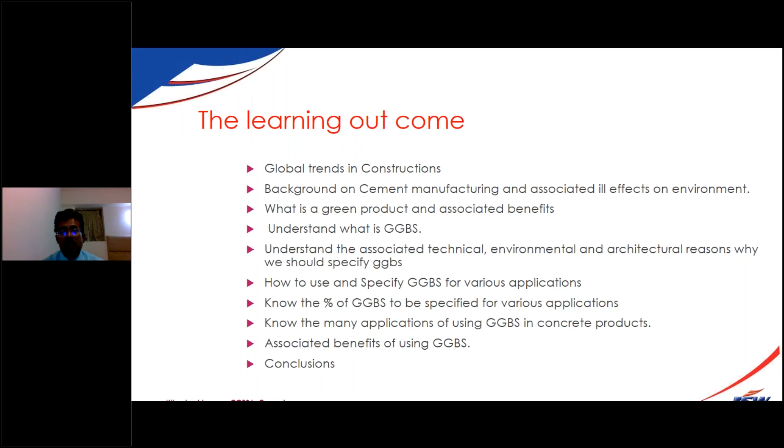Hardly were we making M15 to M30 concrete. Somebody makes M40 grade of concrete - it was a great achievement at that time. But now things have changed. Now we are using a series of mineral admixtures, performance enhancing nano materials, ultrafine materials in concrete admixtures. We have already migrated from ordinary lignosulfonate based admixture to Glenium or PC based admixtures. The technology is advanced, and we are using a lot of nanomaterials in concrete making.

The grade now - recently I was checking, M20 grade was predominantly 70%. Now in Bengaluru, I'm checking the M30 grade - we have already migrated to M30 grade. About 60% of the concrete is M30 grade, or 50% of the grade. So as we increase the gradation of concrete, the usage of mineral admixtures plays an important role. In Karnataka itself, or Bengaluru itself, we are making M80, M100 grade concretes generally now for many structural applications. So when you go for high grade of concrete, we require high durability, high performance. That can only be possible using mineral admixtures, either fly ash or GGBS.

You can maximum use cement only up to 450 kg, pure OPC cement. Beyond that, the code does not permit because it becomes more and more brittle, and the rate of hydration will increase. But with mineral additives, you can go up to 750 kg based on the grade of concrete. That is the advantage of using additives in concrete making.

So why am I bringing this up? Using mineral additives or GGBS is going to help the whole world. We can see the growth of population, the trend of global population growth. This graph shows 9.2 billion population will inhabit this planet if no world war happens by 2050. I'm talking about another 30 years. The population growth is phenomenal. We are adding more and more people to the planet.

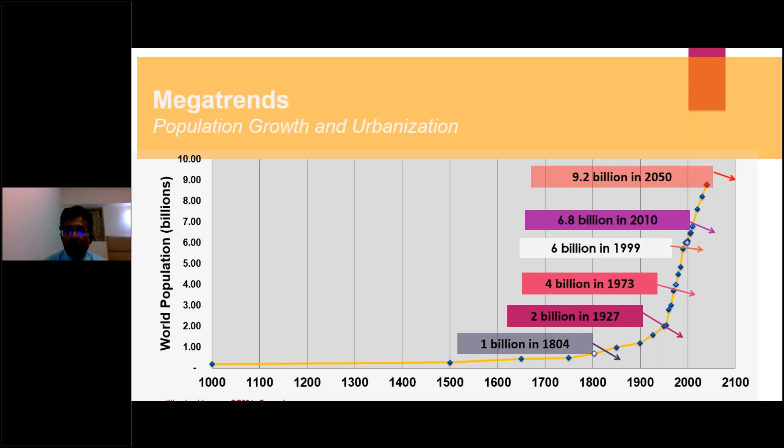This requires housing, infrastructure development, roads, bridges, and also the movement of population from rural areas to urban areas. The Western developed geographies already have 60% of the population living in urban environments because of better facilities, education, jobs. Whereas in India, up to now 40% of the population lives in urban areas, which is going to be 55% by 2050. So imagining by 2050, the population of India may be 150 crores, meaning 75 crores of the population will live in the urban environment. That is going to put enormous pressure on the infrastructure.

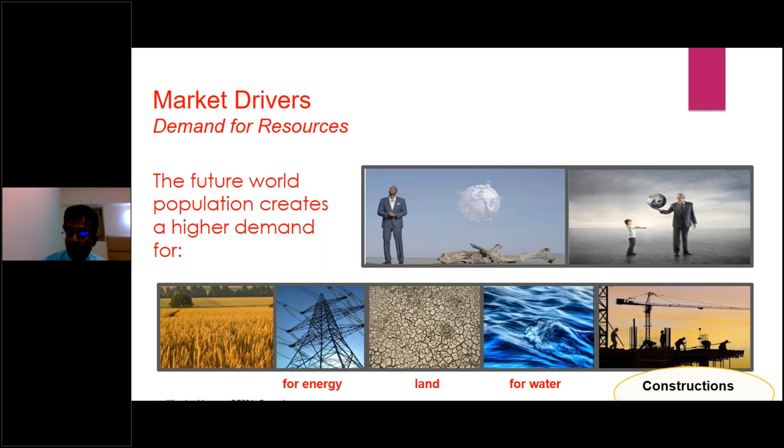In the future, we require energy, we require food, we require more land mass, we require more water, and also we require more construction to give accommodation and proper infrastructure. All that can happen only through construction, and that's where cement and concrete are going to play a major important role.

My dear friends, today construction alone as an industry consumes 40% of the world's energy. Imagine that energy consumption, when we are already struggling in terms of fuel and cost of electricity. Also, construction alone contributes to 30% of the greenhouse gas emissions. Compared to steel, the cement industry alone contributes about 10%, including cooling, heating, and other things. So 30% of total emissions happen because of construction activity, which is never stopping.

10% of global dust is because of construction, mining, and cleaning activities. So with all that, what's happening finally? Our biodiversity is getting affected. We're going to have more and more construction, more and more mining, more and more usage of cement and concrete. So we are not going to create a better place for our children, for future generations.

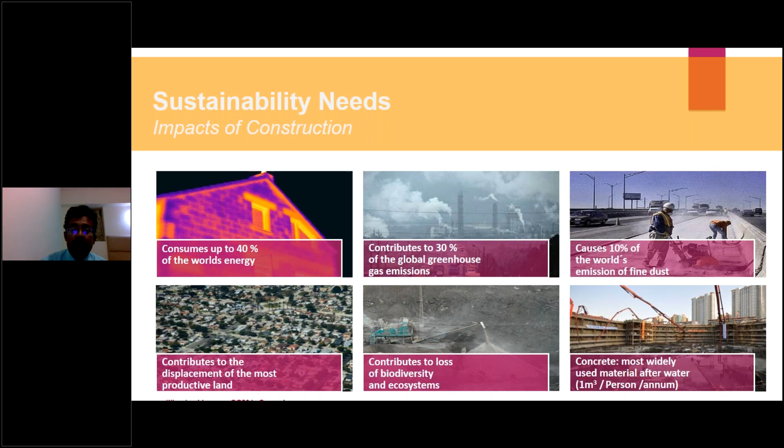So what are the materials of construction? We have so many materials - aluminum, steel, glass, concrete, timber, bricks. We require a lot of energy to produce all these materials. Among all those materials, concrete still remains having the lowest carbon footprint. That's the reason concrete is the second most consumed material on the planet after drinking water. Somebody asked, which is the second most consumed material on this planet? It's the concrete we make to build houses, bridges, metros.

Let us look at the overall global picture in terms of cement production. We had 4.1 billion tons of cement produced in 2019. Among those, India and China produce the maximum cement. China is producing 2,430 million tons, India is producing 320 million tons. Each ton of OPC cement production liberates about 0.9 tons of carbon dioxide, so 1 ton of cement is almost equal to 1 ton of carbon dioxide. So it is not an eco-friendly activity at all.

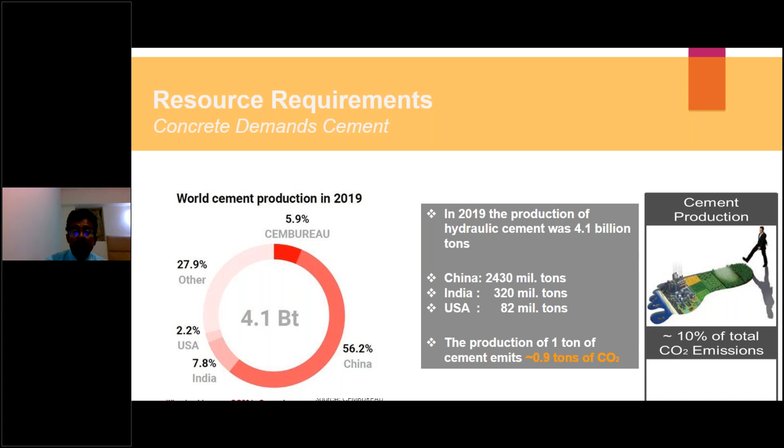Currently we are emitting almost 2.3 billion tons of carbon dioxide just because of cement production. This is coupled with mining of limestone and creating scarcity of available land for cultivation. What's happening because of all that? Creating landfills, tremendous emission of carbon dioxide, shortage of fresh water, because we require a lot of water for processing of cement in the cement mill, and that water is also used for concrete making.

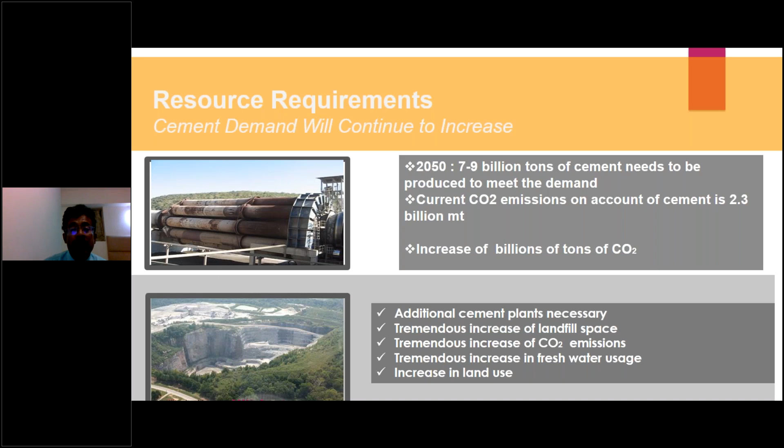But our construction is not stopping, my dear friends. We are going ahead - the Burj Khalifa was the tallest building at around 828 meters. Now the Kingdom Tower is coming in Saudi Arabia, 1 kilometer tall. We don't know what comes next. The tallest of the tallest buildings are going to come in Southeast Asia, because there's a huge population explosion and also migration of people from rural to urban environments.

So what is the approach?

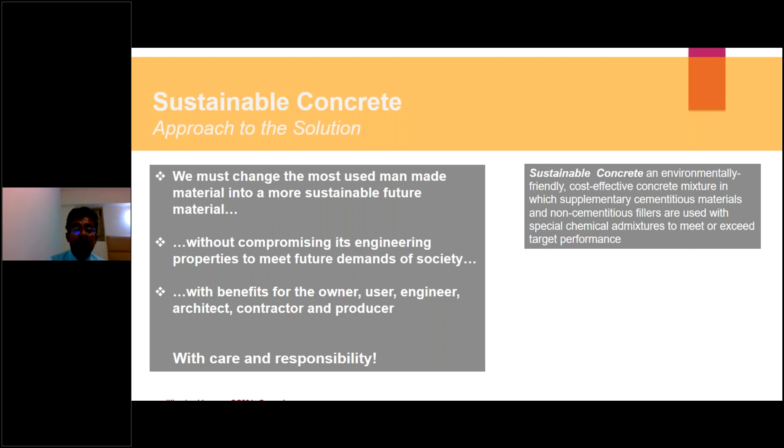We have to make the construction sustainable using sustainable materials, which is going to benefit the owners, the users, the engineer, the contractor - the entire stakeholder family. How to design concrete which is more durable and sustainable.

My dear friends, we have so many materials available: natural materials, industry byproducts like fly ash, GGBS, blended cements, limestone powders, aggregate fines - which is nothing but processed recycled aggregates. Then ultrafine materials like silica fume, kiln dust, rice husk ash, ultrafine GGBS, nanomaterials like QCrete, natural pozzolanas. All these materials are getting utilized in making concrete which is durable, sustainable, long lasting, and reduces the life cycle cost of buildings.

Sustainable concrete should be nothing but good economics. It cannot be very expensive compared to our regular control mix. Sustainable concrete means long life cycle material, reduced maintenance cost, reduced cracks, faster construction, and superior finishes. These are the economics and constructability.

We should construct slender, thin structures, and also reduce the heat of hydration, reduce shrinkage cracks, reduce material volume in terms of steel and concrete. Go for higher grade of concrete, you can reduce the thickness of the columns, reduce the usage of steel.

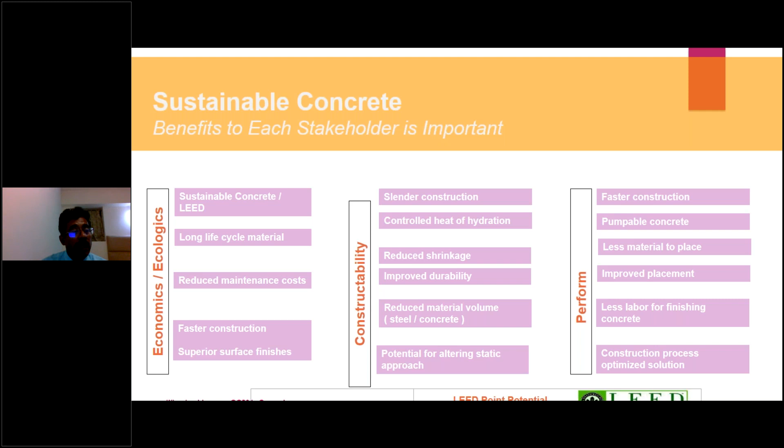Coming to the total background of construction and cement, we need new generation materials. We need to make use of sustainable materials, durable materials, and waste products available from industries. The only alternative is sourcing these materials from the nearest sources and making use of them, whether it is SCM or M-sand.

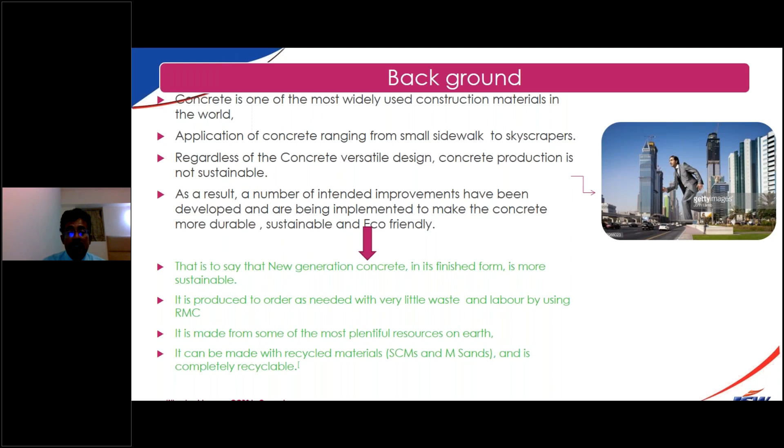Cement production is not an eco-friendly activity. We have to cut down because it consumes a lot of limestone - 1 ton of cement making consumes 1.5 tons of limestone. It also consumes coal, and today coal costs $350. So for each ton of OPC cement making, the additional cost is about 600 rupees per ton. That's an increase from $142 to $350.

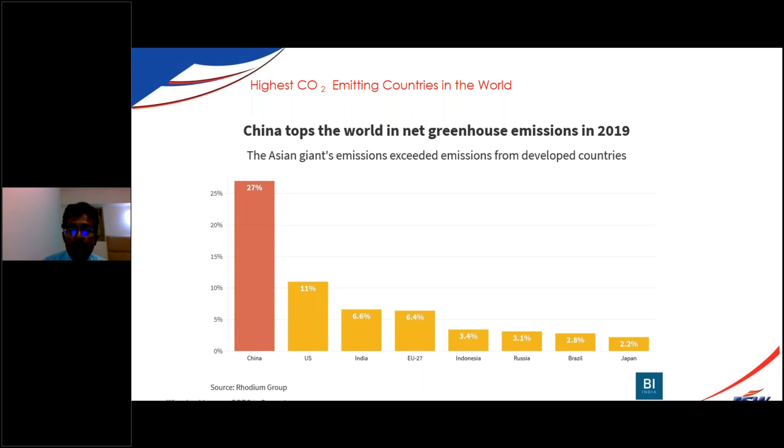The coal price has gone up almost 60%. Electricity consumption is more, emissions are also more. We have to work on this, and India is not lagging behind - India is the third largest emitter of carbon dioxide. China is 27% of global emissions, America 11%, India 6.6%. It is much higher compared to the European Union, so we have a larger role to play compared to other developed and developing economies.

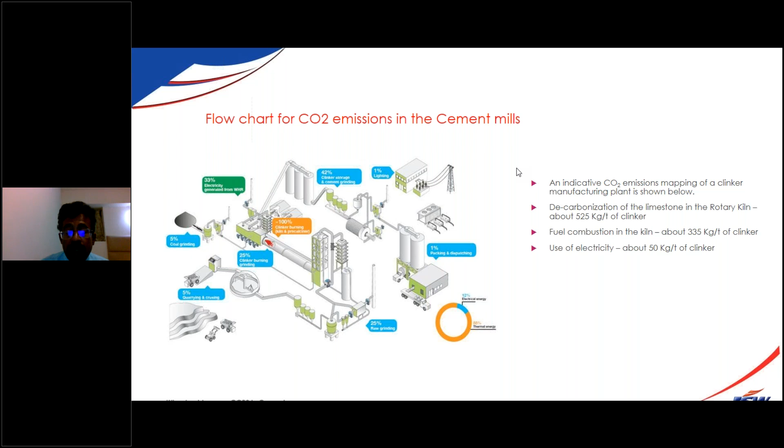As I told you, cement production is something which cannot be easily controlled. If you want to make OPC cement, decarbonizing the limestone is going to emit 520 kg per ton of clinker production. Fuel combustion contributes about 335 kg, and electricity usage about 50 to 60 kg per ton. All put together, clinker making emits about 930 kg of CO2.

So with that, we are facing a huge problem - the greenhouse gas effect. The temperature is warming, ocean temperature is warming. That's why we are seeing unforeseen rains, heavy rainfall, cloud bursts, cyclones, hurricanes. All that is happening, so we have to avoid all that.

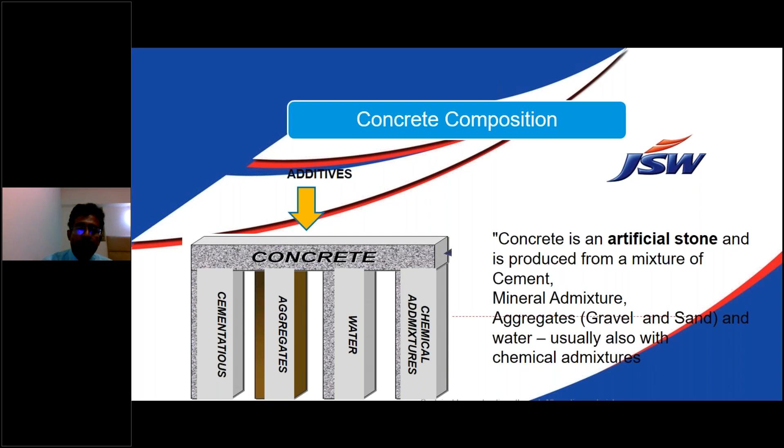So when we want to make concrete, we desire so many performances from it. During the initial stage it should be workable, easily placeable. When it hardens, we look at compressive strength - 3 days, 7 days, 28 days compression. And durability performance, looking at sulfate resistance, chloride attack resistance, alkali-silica reactions, and lesser permeability.

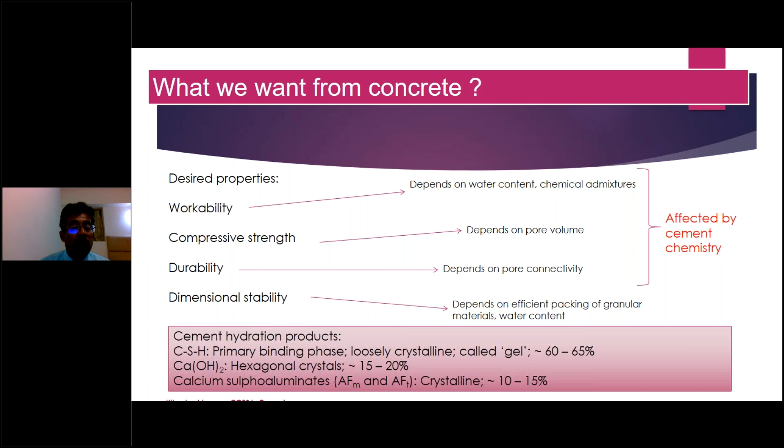These are the things we look into for concrete performance. So what are the challenges we face when we make fresh concrete in the initial stage? We want the concrete in the ideal condition to have lesser cracking and lesser voids. But what we get is generally more cracks, excess voids, bleeding of the concrete, segregation, and poor interface.

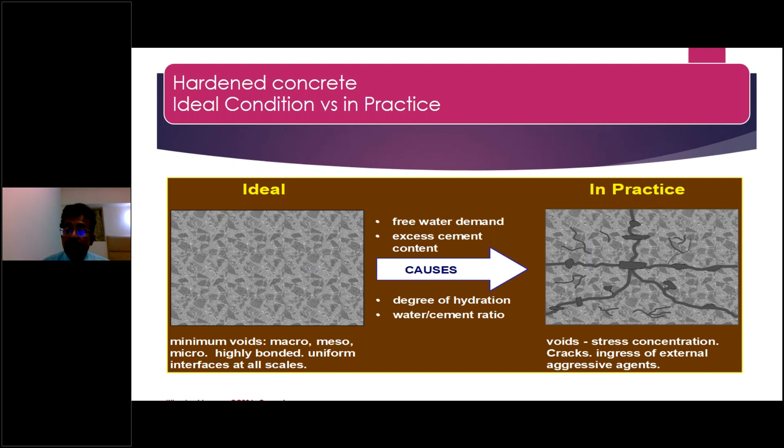When the concrete is set, we want lesser voids, we don't want any honeycombs. But when the concrete is set, we always come across cracks and voids, and it will lead to the entry of aggressive external agencies. What are the external agencies which are going to enter the concrete?

First is the moisture, second is carbon dioxide, chlorides, sulfates. These are all going to enter the concrete, whether it's coastal concrete, concrete used for marine structures, concrete used for urban environments, or concrete used for roads, bridges, tunnels. Everywhere we have these external agencies acting on the concrete, and finally they will enter the concrete to the steel interface and affect the reinforcement, which is going to take care of our tension.

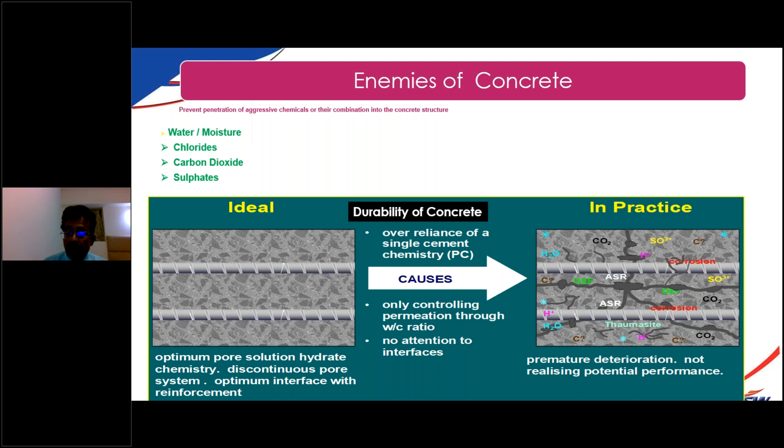Once the reinforcement gradually starts corroding, then expansion of the surface of steel will happen within the concrete, and cracks will develop. So finally, we are going to have a weak structure which is going to collapse after some time.

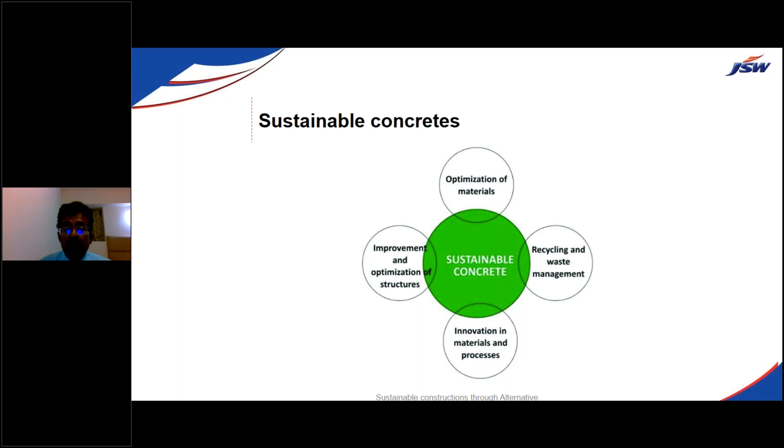So the need of the hour is going for sustainable concretes. So my dear friends, sustainable concretes, how can we make them? We can make them using many technologies, using optimization of materials, using innovative materials, using recycle and waste management products. So with all that, we can develop sustainable concretes.

After developing sustainable concretes, we need to look at durability, which is very important. If you develop sustainable concrete which is not durable, then we are failing, we are not able to meet the requirements of structural consultants. But by achieving sustainability and economics, durability achievement is very important. That is only possible using SCMs which are very eco-friendly.

So concrete deterioration mechanisms include both physical and chemical deterioration: acid attacks, seawater attack, sulfate attack. Already we have discussed these parameters, alkali aggregate reactions, leaching. These are the various things happening to concrete.

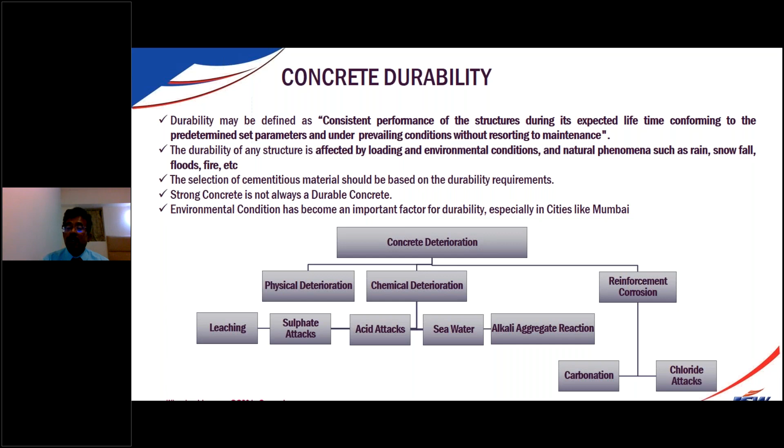Reinforcement corrosion happens through carbonation and chloride attack. These two agents will attack the reinforcement. So we need a product which can overcome all these difficulties.

A product like cement, which can replace up to 70 to 75%, gives enormous savings on the cost of your concrete. Saving is also very important, because when you use any eco-friendly material, the cost should not go up. That is what we are expecting. And long-term strength should be available at doorstep. If the product is not available, even though it's very good, we cannot make use of this product. And it enhances the life and durability of the structures.

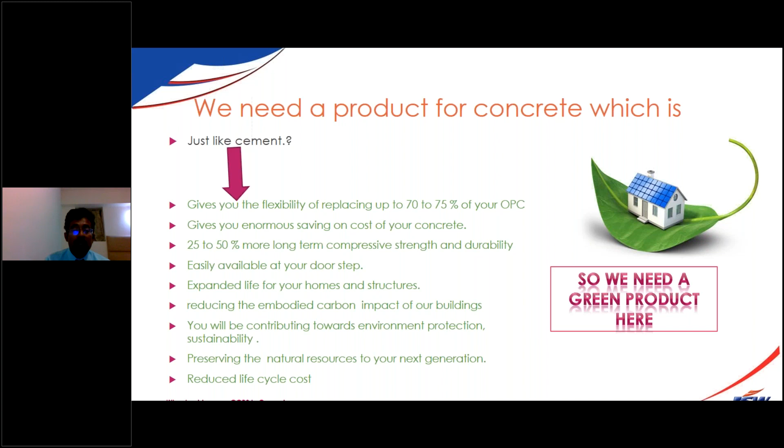All these achievements, how can we get them from a single product? There's one product which is energy efficient, because its production will emit only 50 to 60 kg of CO2 per ton of production. It's a recyclable product, it's a byproduct from the steel industry, sustainably sourced, it has extended life for the structures, and we can also certify the building with it. What is that product called? It's called GGBS. GGBS is ground granulated blast furnace slag.

How is it coming? Somebody may ask, where is that product from? This product comes from steel manufacturing, it's a byproduct of steel manufacturing. My dear friends, when we manufacture steel from the blast furnace, we add flux and raw materials to heat the iron ore to 1500 degrees centigrade.

We had coke, iron ore, and limestone. So limestone, iron ore and coke as a flux are heated up to 1500 degrees centigrade. When it's heated up to 1500 degrees centigrade, as shown in the diagram, we get the heavy metal separated, that is iron. We take it out and go for the steel production of various items.

So we get 30% for each and every ton of the raw mix, meaning we get 700 kg steel and 300 kg molten slag. That molten slag has to be properly treated and quenched into fine granules using technology. It's not possible to just let it flow, it becomes solid rock and we cannot do anything with it. So using the latest development of technology, we make it into small granules like sugar.

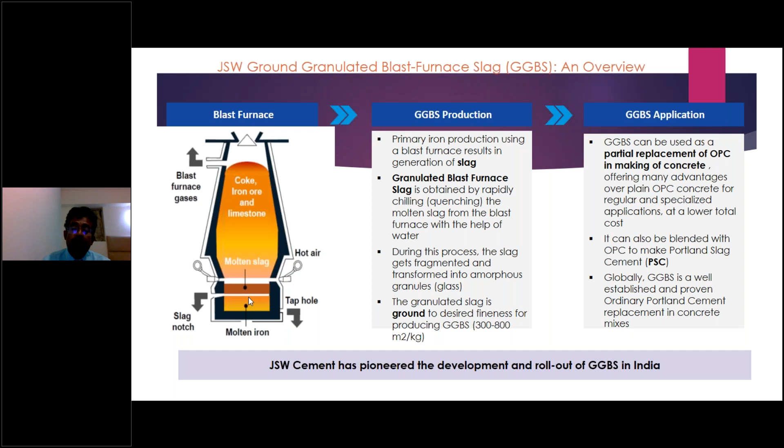So this is the line diagram showing how limestone, coke and iron ore go together to the blast furnace. So we get iron making and we get blast furnace slag, which we convert into GGBS, and we also convert into slag sand.

Looking at the chemical composition, my dear friends, this has a very good chemical composition. As per the IS code requirement, the glass content should be 85% minimum, but what we are making is more than 95%.

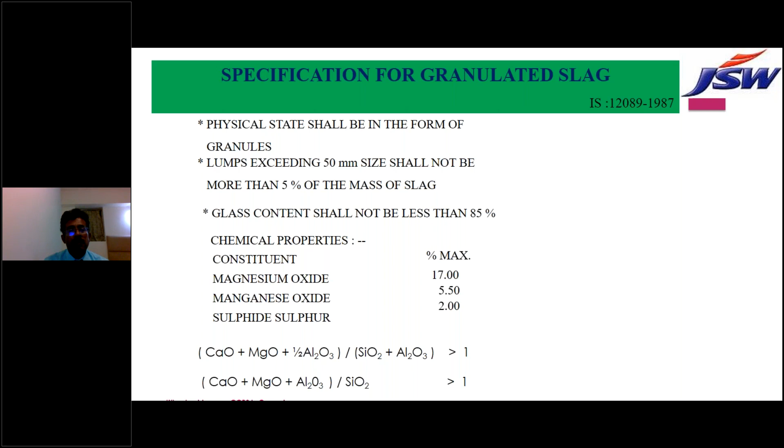So looking at the mechanism, how GGBS is going to help us is this way. When we make OPC cement and add water, we get calcium silicate hydrate gel. So what happens? We get calcium hydroxide and CSH gel. This calcium hydroxide is a very unstable product, like cholesterol in the concrete.

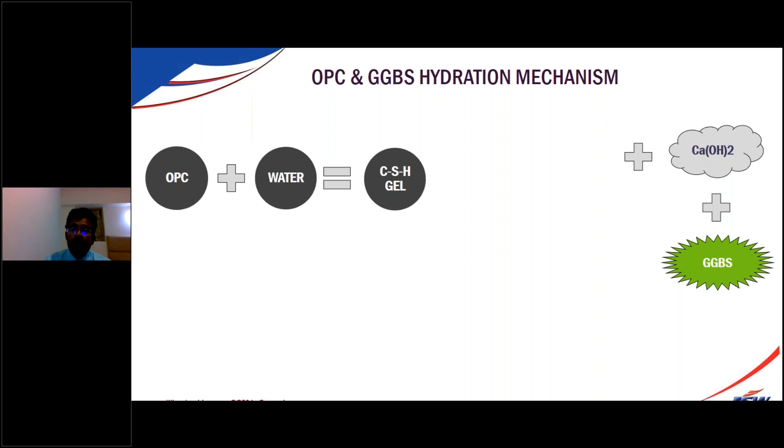How do we deal with cholesterol? We have to remove it. We need to remove the calcium hydroxide as much as possible from the concrete matrix. How can that be done? By GGBS. GGBS has higher calcium oxide content, CaO up to 40%, and it will react both hydraulically and pozzolanically along with calcium hydroxide to convert it into a durable product, additional CSH gel. That is the advantage of this product.

So it's going to have a double reaction. Double reaction means more strength, more durability, more particle packing. These are all the advantages of using GGBS.

So nowadays high grades of OPC 53 cements are coming to the RMC plants, and everybody wants to copy it: how much strength I am giving after 28 days. That is the challenge everybody faces in the market. All the cement companies say, my strength is more, my strength is more.

But how is the strength more? Because C3S is more in the cement. If more C3S, as I told you, we get lesser CSH gel and more calcium hydroxide. C2S gives 82% CSH gel and 18% calcium hydroxide. So as we go to higher grades of cement, you get more calcium hydroxide.

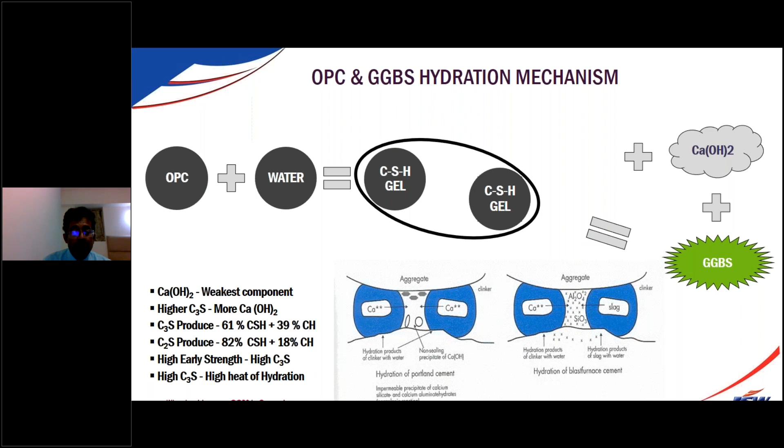So that is very detrimental to the concrete. What I'm telling you is you have to reduce the calcium hydroxide in the concrete matrix. That is only possible by replacing the OPC content partially using GGBS or fly ash.

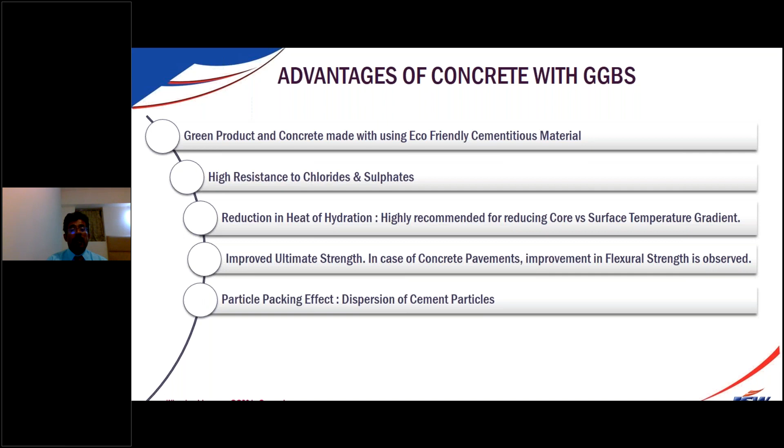The advantages of GGBS are many. It's an eco-friendly product, with high resistance to chlorides and sulfates. I'm repeating this because the advantages are many and should be remembered: reduction in heat of hydration, improved ultimate strength in terms of flexural and compressive strength, beautiful particle packing due to higher dispersion of cement particles, improved resistance to corrosion, and improved water impermeability. These are the many advantages of using GGBS.

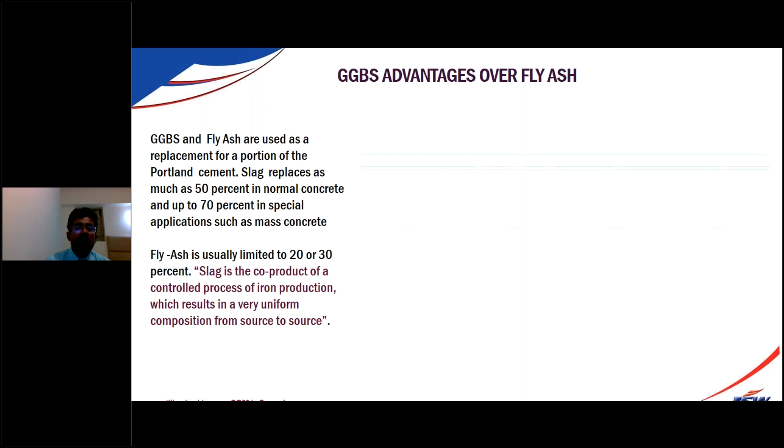Now look at fly ash. Fly ash has only 2% calcium oxide. It may be rich in silicon dioxide, so it does not participate immediately in the concrete hydration process. It may take 3 or 4 days to participate.

But since GGBS has 40% calcium oxide, after 10 hours when the concrete sets, walking on it should not leave any impression. Maybe 10 or 12 hours, and the GGBS immediately starts reacting so there is no tremendous drop of strength in the concrete. So those who have the mindset that using GGBS reduces strength have to remove that from their mindset, because this has calcium oxide. That is the beauty of the product.

Also, when you want to use fly ash, it's all given by transporters. They go and load it from a power plant, and if it's not available, they may load pond ash or lesser finer material instead.

There is no MTC given. They don't tell you which source they are getting the material from. There is no bill. All the issues are there with the fly ash. But it's still a product people are using.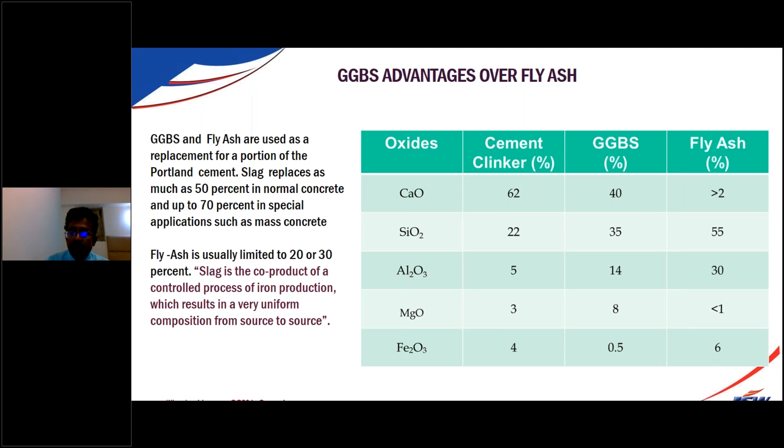When it's GGBS, it comes with a manufacturer MTC, so it's just like cement. It gets all certification, it's having green certification, so you can close your eyes and use the product. Otherwise, every time you get a fly ash truck, you have to check for fineness, residue, all those things. Consistency is always there with GGBS, but that is not there with fly ash.

With replacement levels, you can replace up to 35% maximum with fly ash. The quality is very good, but generally people are going with 30%. Whereas on the other hand, if you are using GGBS, you can go up to 70%. There are instances where people have used up to 85% for many applications.

In our own, in Karnataka, the Karwar Seabird project, where they are doing piling, Larsen and Toubro are going up to 70% for grade M55. So that is amazing, because they have found the benefit of using the product in terms of performance, mainly durability.

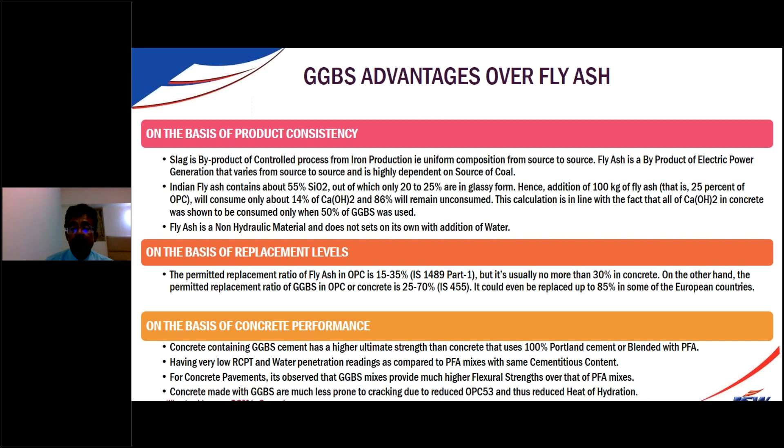So, consumption area and applications. GGBS is going into Ready-mix concrete, captive plant projects, asbestos sheet manufacturing, hollow blocks, tile adhesives, tile grouts. Many applications it has found, going for soil stabilization also.

It's a versatile material. People are making some white cement, bit whitish in nature. So using white cement, they're replacing white cement for tile adhesive applications, for color concreting applications. GGBS can replace white cement, which is quite expensive, per kg maybe 10 to 15 rupees, whereas this comes at an average of 4 rupees per kg. So this is a very good replacement where you want decorative products.

Many studies have been done at various laboratories. The IIT study is one such study where we have done GGBS mixes. You can see the graphical representation of how the strength improvement is happening with various percentages, starting from 100% OPC, 60 OPC 40 GGBS, 50-50, 40 OPC 60 GGBS, and 30 OPC 70 GGBS. With that combination, I will show how the strengths are growing.

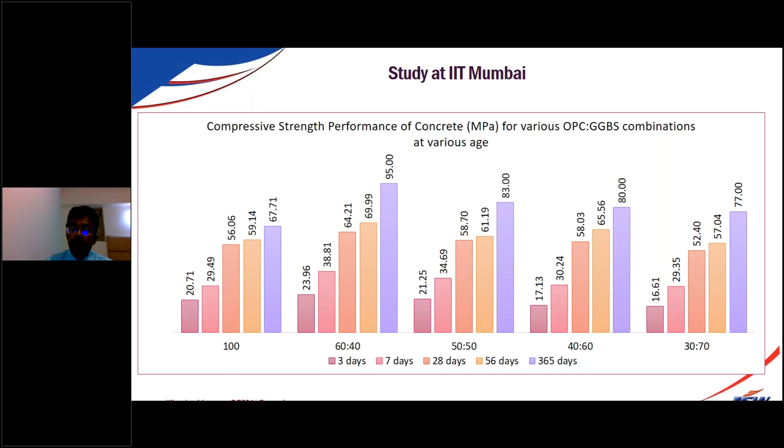Earlier, the OPC strengths are better, but gradually, when you look at the overall compressive strength at 56 days, 365 days, the higher GGBS replacement has performed much superior to the ordinary Portland cement-based concrete. You see, with 40% replacement of GGBS, 95 MPa, with 50%, 83 MPa, 80 MPa with 60%. That's how the advantages are many.

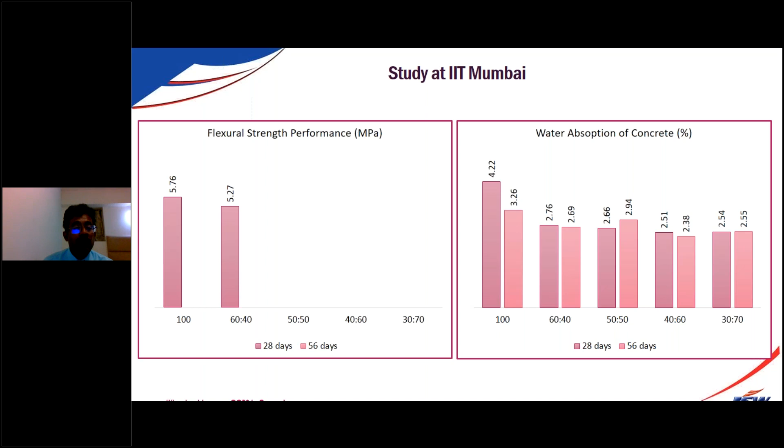Looking at the water absorption, you can see the results at 56 days, the higher replacement is coming down gradually. Similarly, flexural strength at 28 days, 56 days, gives a better performance with higher replacement. So we have seen optimum results at 50 to 60%. Similarly, carbonation depth gets reduced with higher replacement levels compared to OPC mixes.

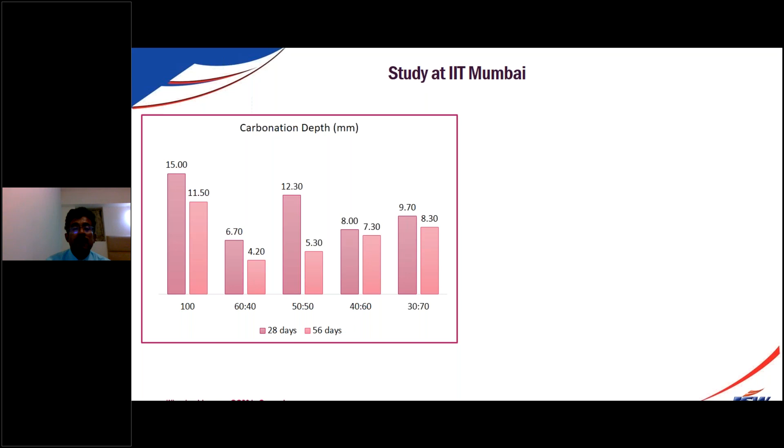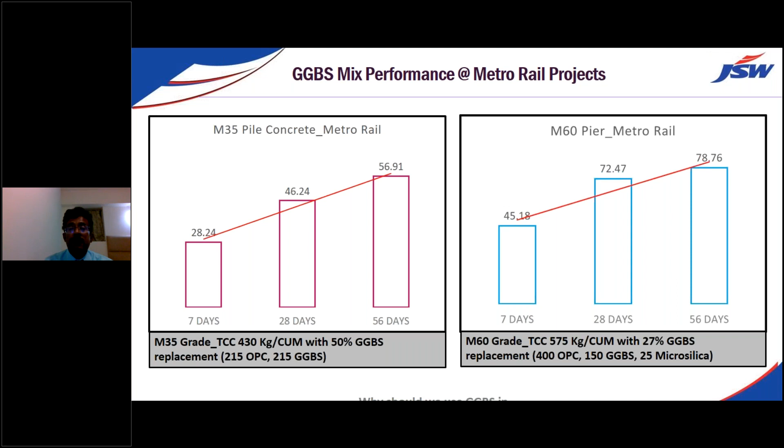Migration tests - I'm going to share the PPT with all of you. Similarly, looking at the mix proportions at metro projects where we have done various mixes, M35 grade with 50% replacement shows a gradual jump in strength, 56 days compared to 28 days, almost 10 MPa more strength in the pile mix. Similarly, M60 grade concrete has given better performance.

That's why I want to call GGBS the most sustainable material on this planet, because it brings down CO2 emissions enormously. Each ton of OPC cement emits 930 kg CO2, whereas production of GGBS only emits 60 kg per ton. So if you mix 50%, net emissions come down significantly. For every ton of GGBS, you are going to save 870 kg CO2.

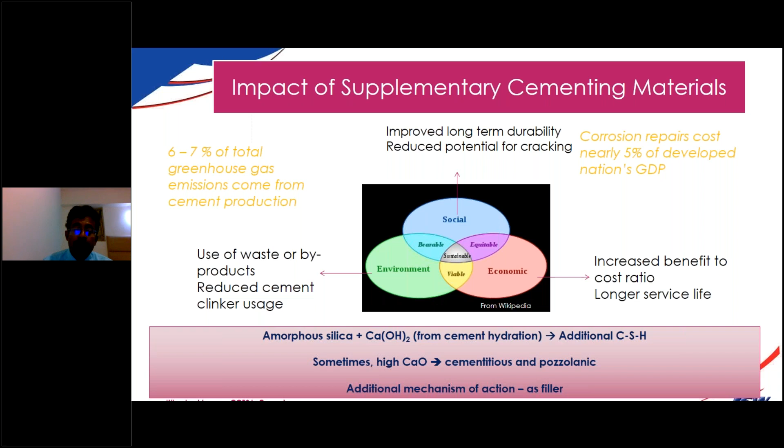Let us say if you are using 10,000 tons of GGBS in the concrete, you are saving the equivalent of 10,000 trees, because each tree absorbs 1 ton of carbon dioxide in its lifetime. So sustainability is very important, because it comes with social benefit to the end users, economic benefit to the contractors and the client, and environmental benefit by reducing the carbon footprint. This can all be achieved by using supplementary cementitious materials.

So I'm going to talk about many case studies with this. The advantage of the mix design - you may always feel, okay, you have to add more admixtures. It is not so. The same combination of admixtures, transportation time is the same, concrete manufacturing time is the same. So there is no change at all, it is just replacing the OPC content in the concrete.

Also, using GGBS, since it is finer than cement, your admixture dosage will come down. I've generally found at least 0.1% admixture dosage reduction when using GGBS. Many admixture companies, when any new project comes, they come to us saying there's scope for using GGBS. We laugh and ask, why are you promoting our products? Because if you use your product, my dosage comes down, so I can give a better rate to the end users, the consumers, the contractors.

So benefits are many. Engineering benefits up to 30%, usage benefit up to 85%. 50% replacements are general where commercial ready-mix concretes are used. Wherever specified, people have gone up to 30 to 70%.

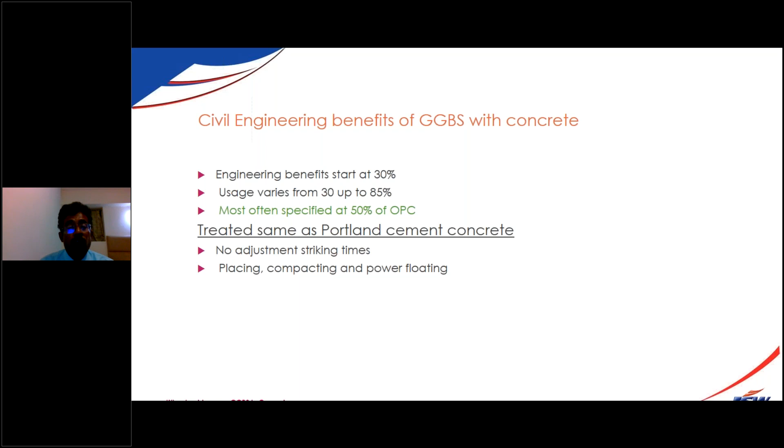So people have to remove that from their mindset, thinking shuttering time will get distorted. No, there's no adjustment in striking time. You can demold and de-shutter the buildings at the same time as you would with OPC cement, because this is a hydraulic material. Placing, compaction, power floating, everything goes smooth, compatible with admixtures.

That's the beauty, because we are able to sell 4 million tons per year. Otherwise, it would have been much more difficult.

Various replacement levels exist for applications, based on the requirement. For mass concreting, go up to 60%; for column structures, 35 to 40%. Based on the grade of concrete, for Mivan formwork where M30 grade is generally used, smart dynamic concrete goes with 50% replacement. So based on applications, we can vary the content. That is the beauty of mixing GGBS at the RMC plant.

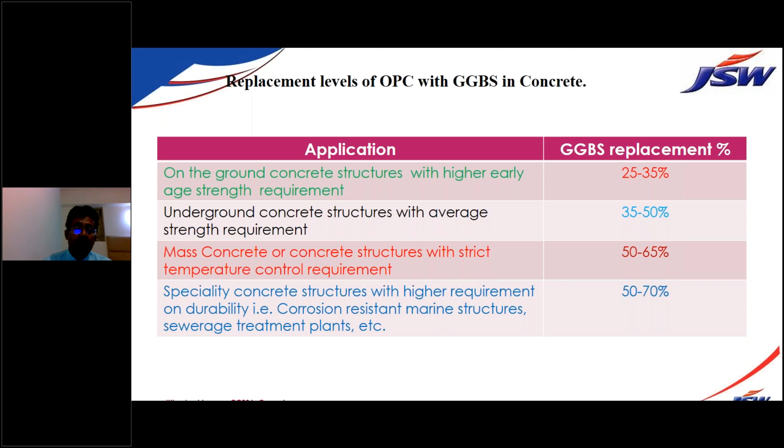When you use a blended cement, either slag cement or PPC cement, that advantage doesn't come to you. With GGBS, you can start from 25% to 70%. We can blend based on grades of concrete, distance, requirements and specifications. We can tailor-make it, like adding salt or sugar to food - how much you add based on your taste. It's an additive where you can change proportions based on your requirement and specifications. So working with GGBS makes you happy.

The particle sizes of GGBS are much smaller than cement. So wherever there's an interfacial transition zone, a gap between two cement particles, the GGBS particle will fill in, making the particle packing effect more dense so that voids are avoided. That is the beauty of the product.

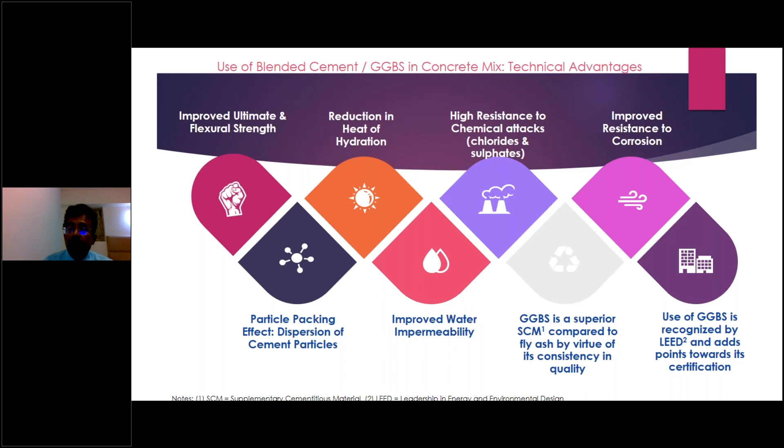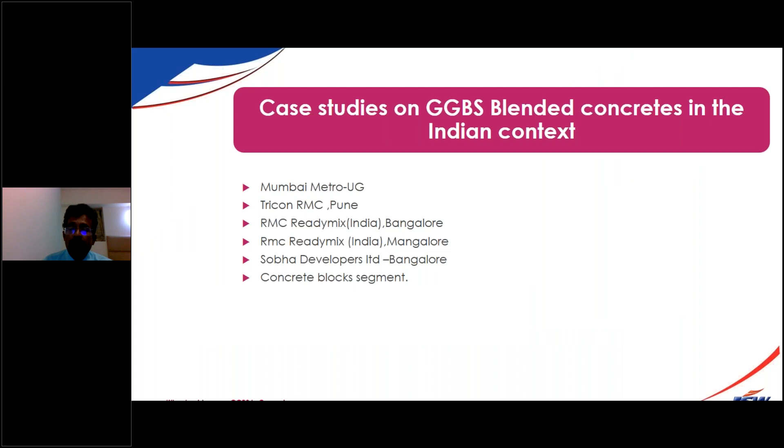These are pictorial representations of how GGBS improves the performance of concrete. Not going to spend much time on this. There are several case studies, and I'd like to go through them one by one, without spending too much time, but all case studies show the performance of GGBS.

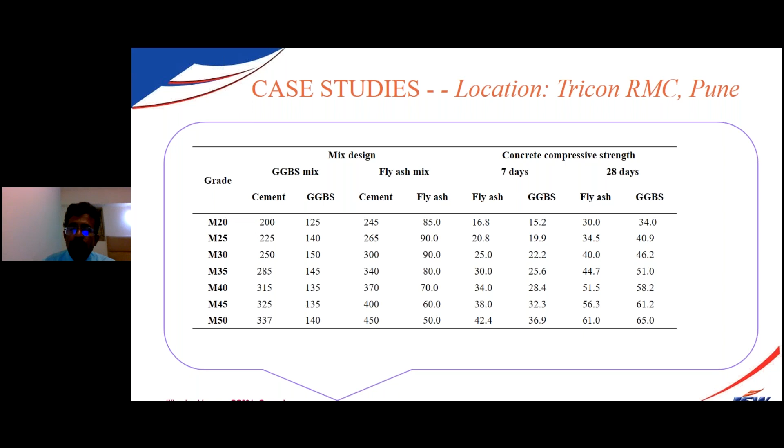Physical properties and other properties - many case studies we have done. At Tricon RMC in Pune, we compared fly ash mix and GGBS mix across various grades, from M20 to M50. The GGBS mixes performed much better than the fly ash mixes. That is the beauty of the product, it's much above.

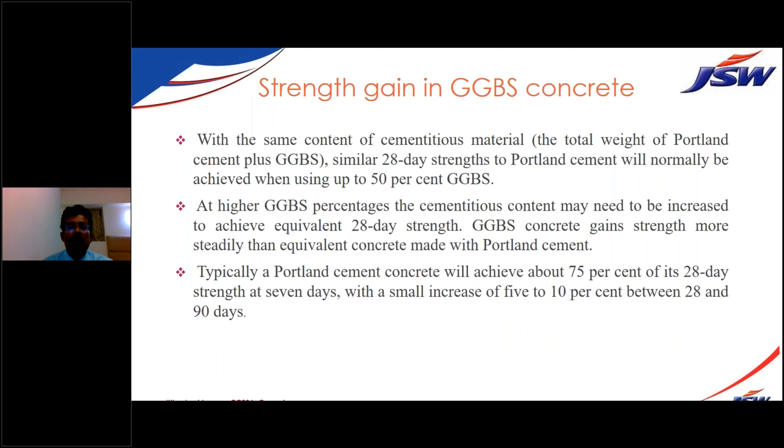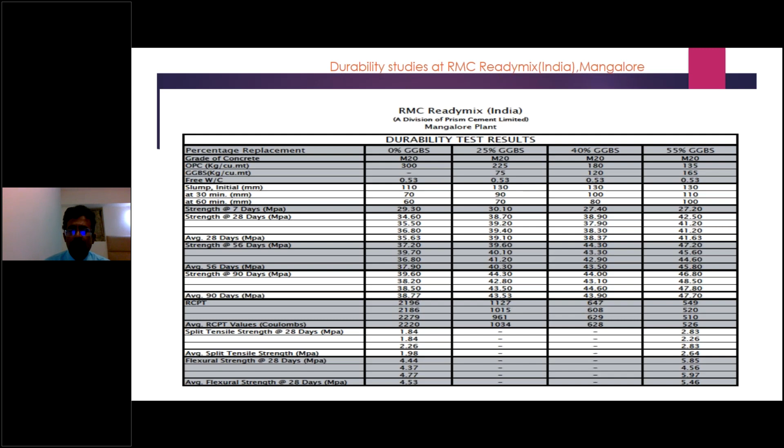Similarly, the durability performance is very good. RCPT value with higher replacement of 55% comes to below 600, between 600 to 500. All parameters - splitting tensile strength improvement is there, flexural strength improvement is there, compared to the durability performance of pure OPC mixes. All these things have been studied at various laboratories, not only research laboratories but practical applications like RMC plants, QCrete or RMC Readymix India. Many companies like Ultratech have studied the product and continuously use it for various applications.

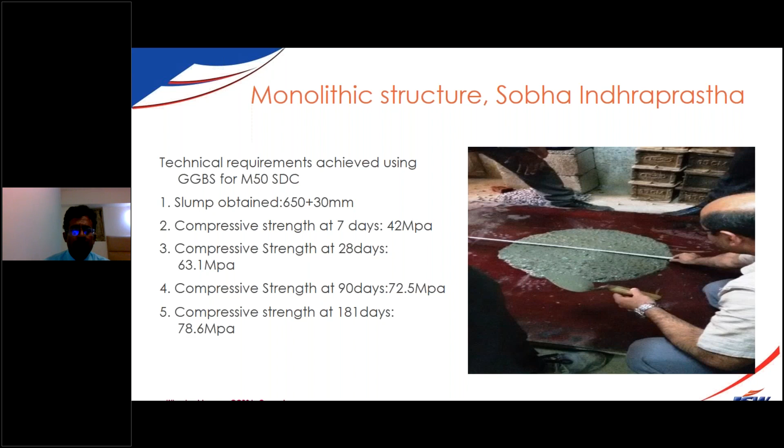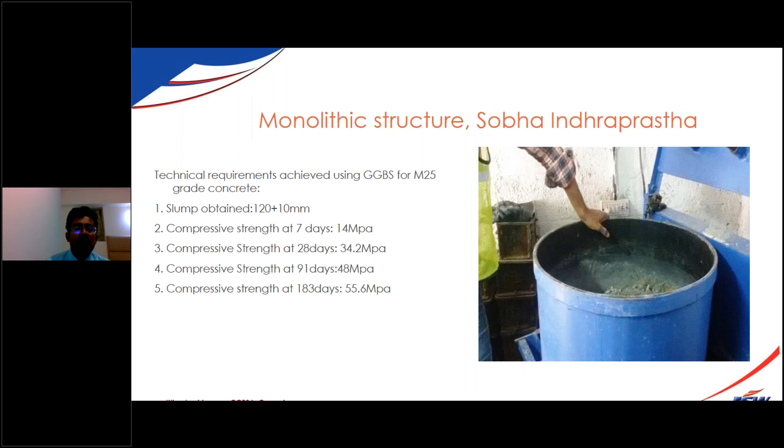You can see the M25 grade concrete giving 55 MPa, almost double the strength of its original grade M25, over 183 days. To make it believable, we have taken a screenshot of the details maintained at their laboratory at site. This is a handwritten document, so we have not fudged any numbers here. M25 grade concrete becoming M55 grade.

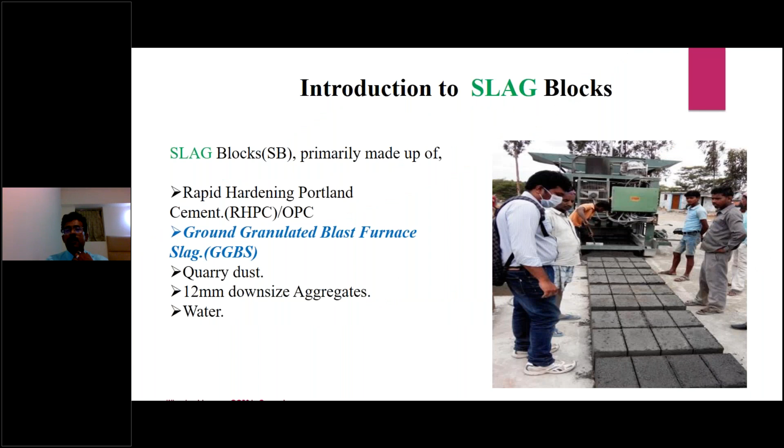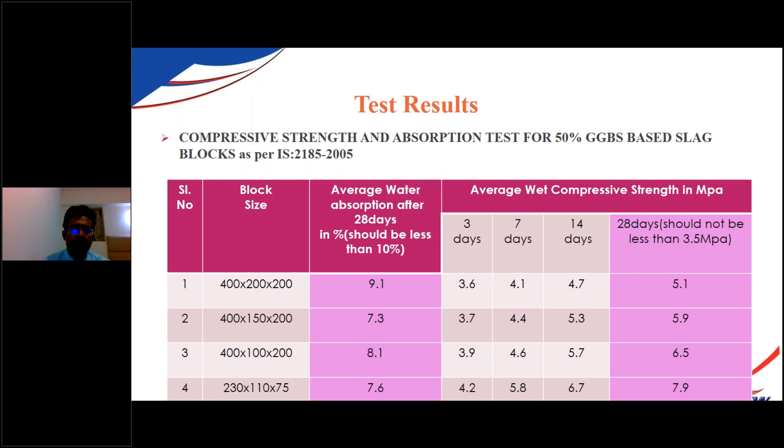Various applications: not only in concrete applications, GGBS is being used for block manufacturing. We have done various studies and performance parameters, tested on bulk density and drying shrinkage. Each block we can save almost 2 rupees, and a company making 10,000 blocks per day can save 1.96 crores per annum.

The advantages in blocks: enhanced long-term strength, better finish, reduced breakages, cost saving of 1 to 3 rupees per unit. It's a green, sustainable product.

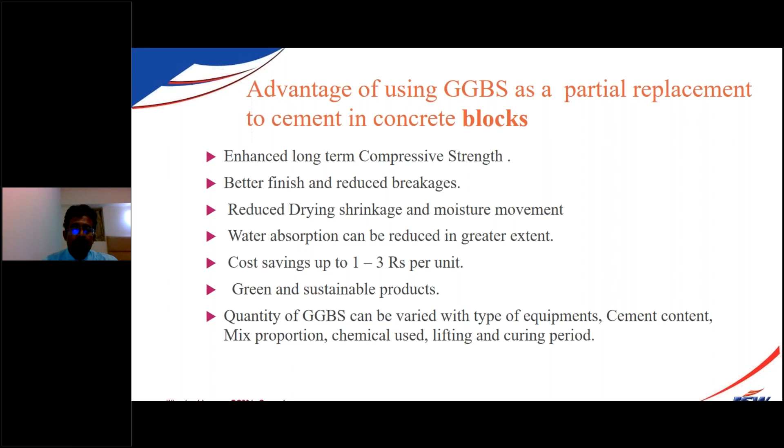Similar way, we tried with door frames, paver blocks, precast slabs - all the applications we have tried out. So it's not only suitable for concrete, but for any application. Coming to durability, I've already discussed in length the durability parameters.

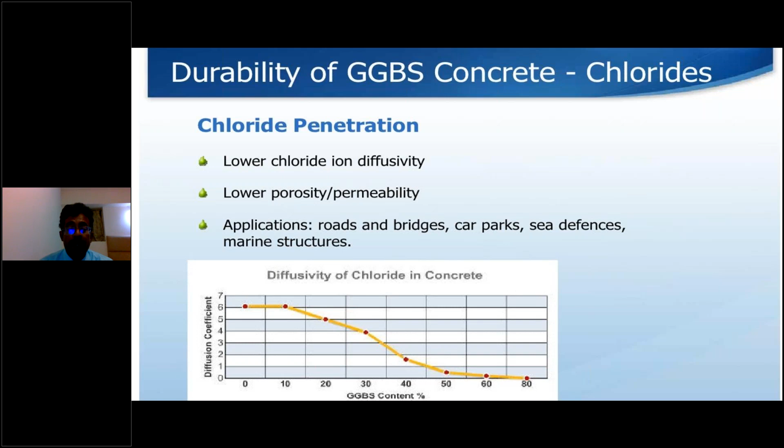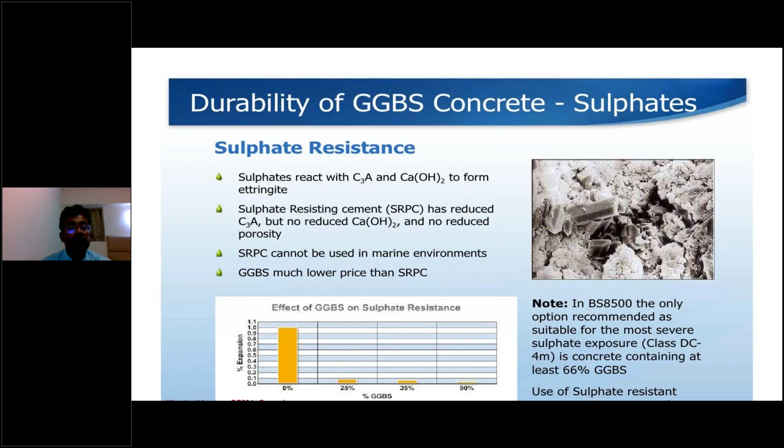With a higher percentage of GGBS, chloride penetration comes to almost 0. Similarly, sulfate resistance is maximized at 50% replacement compared to OPC mixes. Heat of hydration, especially using more than 60% GGBS - if you have a raft more than 1.5 to 2 meters, it will substantially reduce the heat of hydration, which is very good for mass concreting applications.

Aesthetical properties and architectural qualities give a very lighter appearance. Especially when used for PQC or concrete roads, the visibility is much more superior during night time. If you don't have street lights, the road will be visible properly.

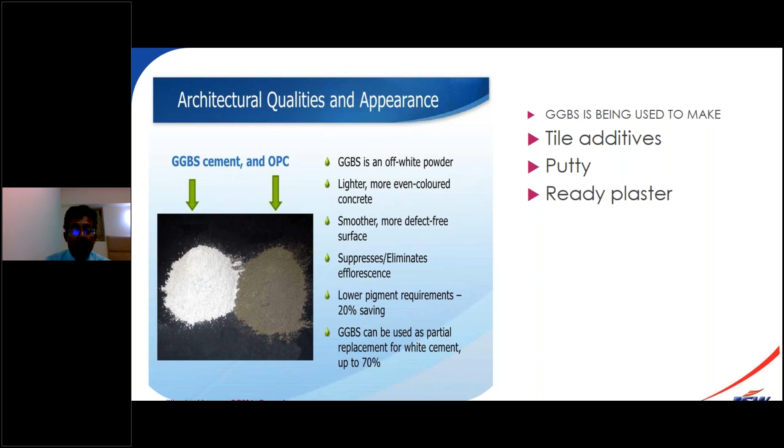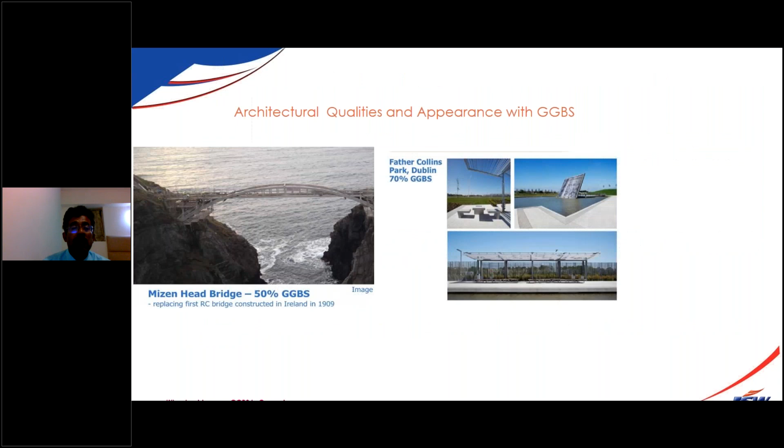Nice road, they are using GGBS. If you want to ride on the nice road in the evening time, you can see the concrete surface very light. It's a product of the future because of various advantages: lesser cracking, light color products, very good architectural appearance, and albedo benefit because it does not absorb more sunlight.

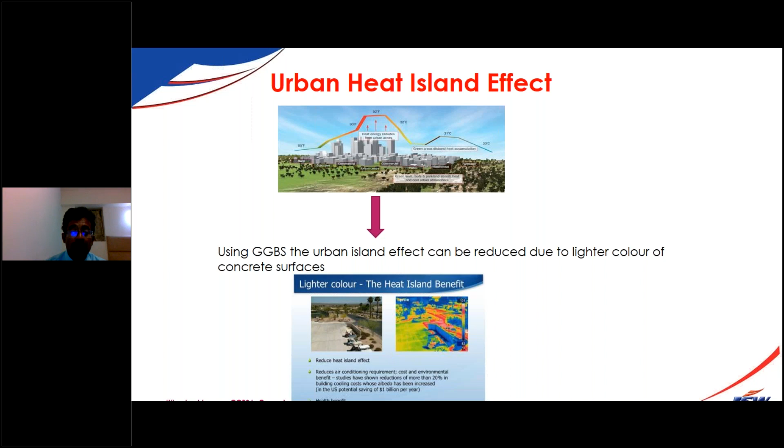It emits the sunlight back so the surface doesn't get overheated, and the earth's temperature does not go up. If you make all the roads with concrete using higher replacement of GGBS in the PQC, definitely the absorption of heat won't happen. The surrounding area will be much cooler compared to bituminous road concrete. Urban heat island effect can be avoided by using GGBS in concrete roads and other open structures, because entire roads in Bangalore or any city are being covered with concrete roads. Bangalore or Mangaluru, we are using only concrete road. So if concrete road is the future in urban environment, GGBS is the best solution to reduce the urban heat island effect.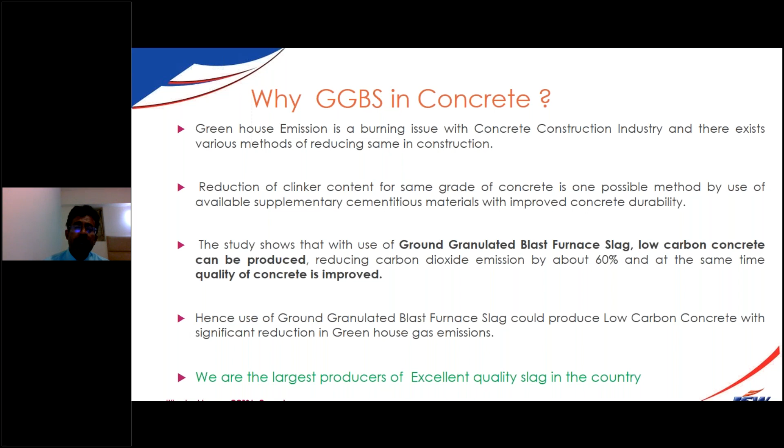I've already discussed these points. Clearly this product stands superior compared to any other mineral additive, because it's a manufactured product, coming from reputed industries. These are the best benefits - a summary of using GGBS.

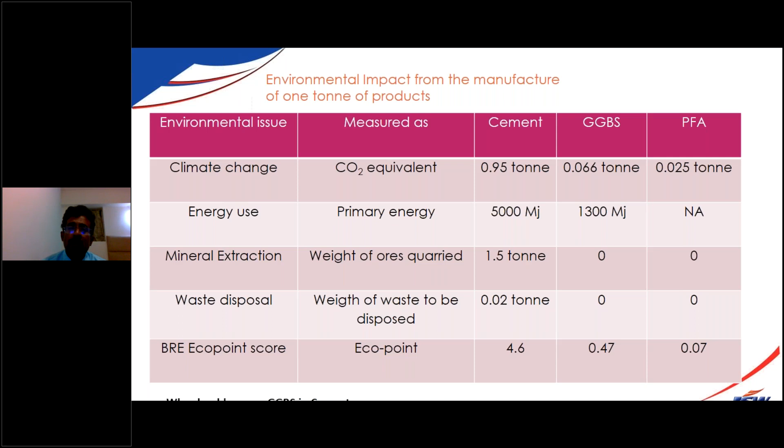Also, environmental impact assessment: if you look at the climate change effect, how much reduction is there compared to OPC cement? You can have a look at it. Overall energy efficiency, mineral extraction, waste disposal - on all these points, GGBS is a class above ordinary OPC cement or fly ash. Look at the greenhouse gas emission per ton of concrete - these numbers have been calculated. This clearly shows GGBS concretes are superior compared to pure OPC concretes, or even superior to fly ash mixes.

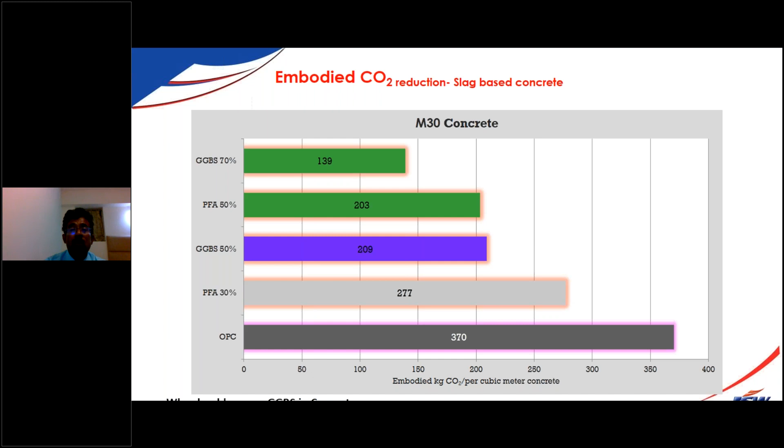With a higher replacement of GGBS, 70%, in M30 grade concrete, how much CO2 reduction can you achieve? It is shown here. I've done a small calculation using 40% replacement for a 350 mix of concrete with GGBS, showing how we can reduce the carbon footprint. For every cubic meter of concrete, 105 kg of CO2 emissions is reduced.

Based on that calculation, we have done this: one tree can absorb 22 kg of CO2 per year, so in its lifetime it's going to absorb only 1 ton of carbon dioxide. That means if I make concrete with 40% replacement of GGBS, it can reduce 105 kg per cubic meter of concrete.

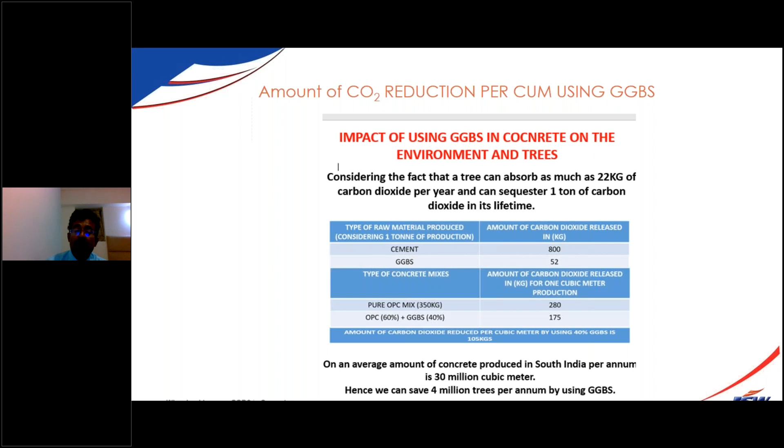I've done a calculation for 10,000 cubic meters of concrete - it is equivalent to planting 1,050 trees, because to absorb the carbon dioxide, we have to plant trees. By using GGBS, I'm not saying you should not plant trees. We may not be able to plant trees everywhere, because in Bangalore we are cutting trees for road works and metro works, talking about 5,000 trees. Now they've announced the peripheral ring road, talking about cutting down more than 1 lakh trees. If you use GGBS for the same road construction, making 2 lakh cubic meters, it's equivalent to saving 21,000 trees. Making 5 lakh cubic meters is equivalent to 50,000 trees. This is what we can achieve.

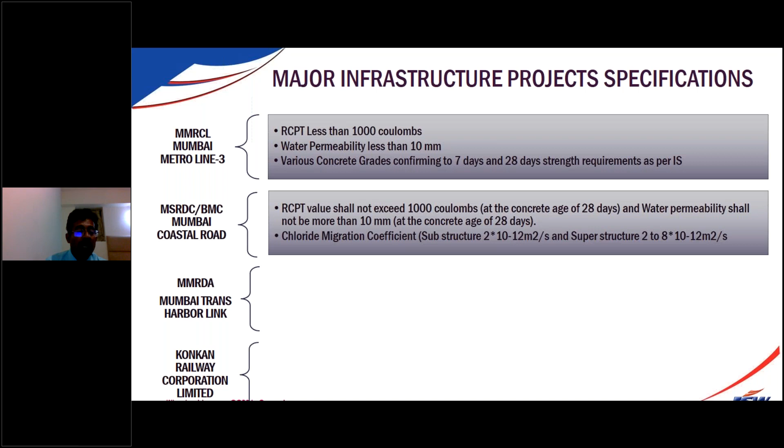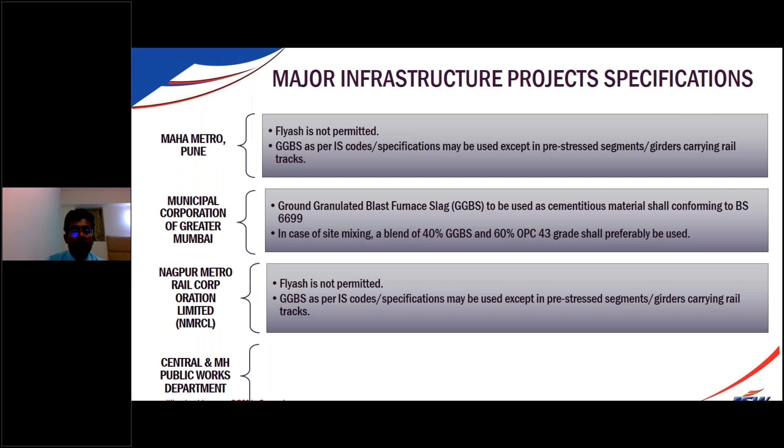Major infrastructure projects have recommended GGBS everywhere: Mumbai Metro Rail, MSRDC, Konkan Railways, Trans-Harbour Sea Link - they've all used GGBS for their applications. Nagpur Metro, Bangalore Metro, CPWD, PWD, Atomic Energy Regulatory Board, National Highway Authority, CIDCO - they have done replacement up to 50%, up to 70%.

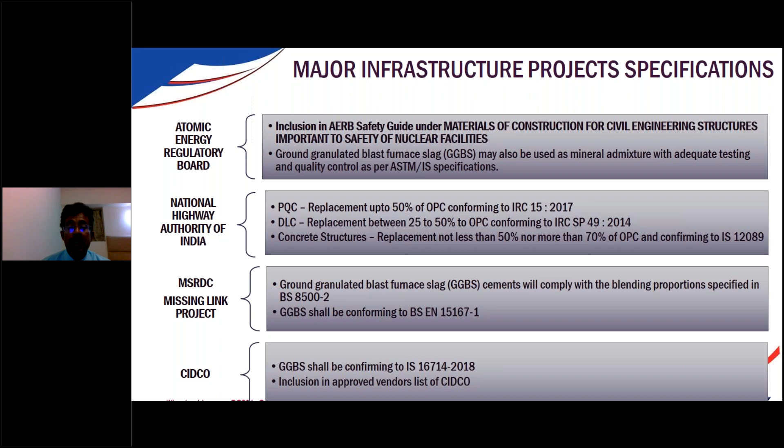Mr. Shelley Fernandez was asking me if there is a code for GGBS. Yes, it is there - GGBS code IS 16714 2018. You can refer to it, you can download it from the internet. That code says how GGBS is manufactured - specification, gradation, fineness, everything is there in that code. Codal provisions in almost all codes mention GGBS as a SCM. The concrete mix proportion latest code has a guideline on mixing GGBS. IRC codes, IRC 15 2017, approve the usage of GGBS up to 50% for PQC, pavement quality concrete.

So many projects we have: Mumbai Port Trust, Chennai Metro, Bangalore Metro - already discussed with you. Major clients, you name any infra company, they are using GGBS. These are the examples, government approvals. Then major infra companies like Tata Projects, Afcons, Dilip Buildcon, Nagarjuna, J Kumar, Soma, Shirke, Megha Engineering - they consume lakhs of tons of GGBS every year.

Commercial RMC plants also: QCrete, Architect, Novaco, Prism Johnson, ACC, to name a few. Almost all the RMC plants in Bangalore, Karnataka are using GGBS as a primary replacement for OPC cement. Residential groups, many builders like Prestige, Brigade, Sobha, Aparna, Hiranandani are using GGBS, Shapoorji Pallonji.

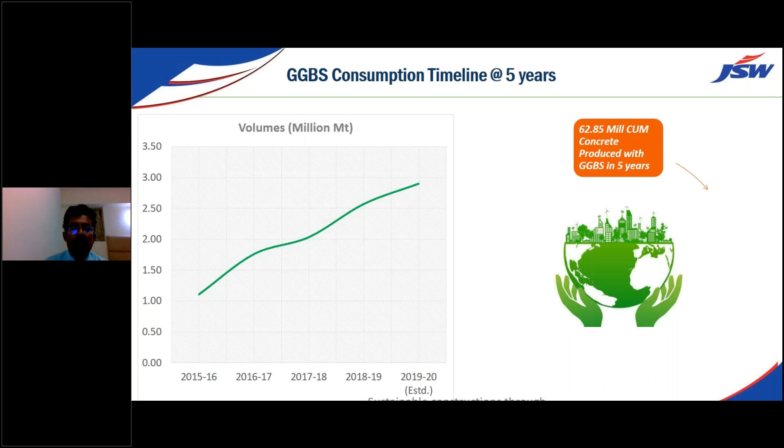We have done a small calculation of GGBS and how it has benefited the whole world - this is the usage for the last 5 years. We've calculated that it has reduced almost 5.24 million tons of carbon dioxide, conserved limestone up to 8.36 million tons, and saved land mass of 10.37 million tons.

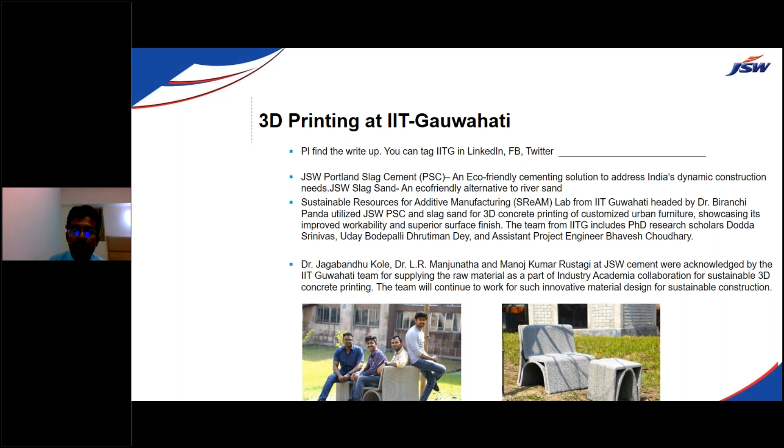Coming to the end of the presentation - we have also done 3D printing. We have partnered JSW Group with IIT Guwahati for R&D work on 3D printing. We sent the GGBS and slag sand, another additive byproduct of slag. These are the PhD students who are working on this project - they have printed this table and chair using GGBS mixes.

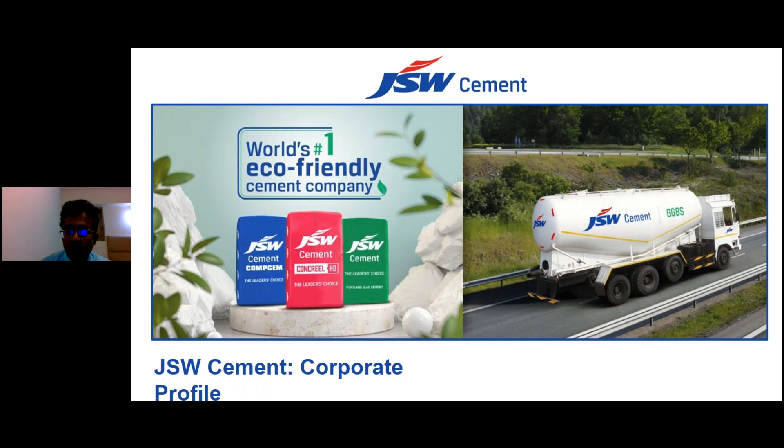With all that, I would like to talk about my company at the last - JSW. This is the largest eco-friendly cement company, the number 1 eco-friendly cement company in the world. There are so many big companies like Cemex, Holcim, Ultratech, Vulcan, many companies - they are global leaders. But JSW is the first number 1 cement company. Our carbon footprint average is 248 kg per every ton of cementitious material, whether OPC, slag cement, blended cements or GGBS - our carbon footprint is the lowest in the world, with an average of 248 kg.

So with that, I would like to conclude my presentation. It's a material of choice - GGBS helps to rebuild the whole ecosystem with sustainability, growth, and development. It is not being used just today - it's been used for more than 75 to 100 years. It's tested globally - many countries have adopted using up to 80% GGBS in the mixes. With that, I'd like to conclude with my note that we have a great future ahead.

Using these wonderful products available in plenty - you may ask how much is available. Currently India is producing about 40 million tons of GGBS, which is slag, from a steel production of 130 million tons. By 2030, steel production is going to go up to 300 to 320 million tons. With that, we are going to have about a minimum of 100 million tons of slag. That is equivalent to, if it's going to be used up to 70%, where we use fly ash up to 25%, 3 times the usage of fly ash.

So if fly ash is diminishing because government is closing down the thermal plants and moving to renewable energy like wind and solar, GGBS is coming up because steel production is going to go up substantially. We need more steel for infrastructure, so we are going to get more slag, more GGBS. It is going to be the product of the future, and availability will be enhanced throughout the country wherever our steel plants are.

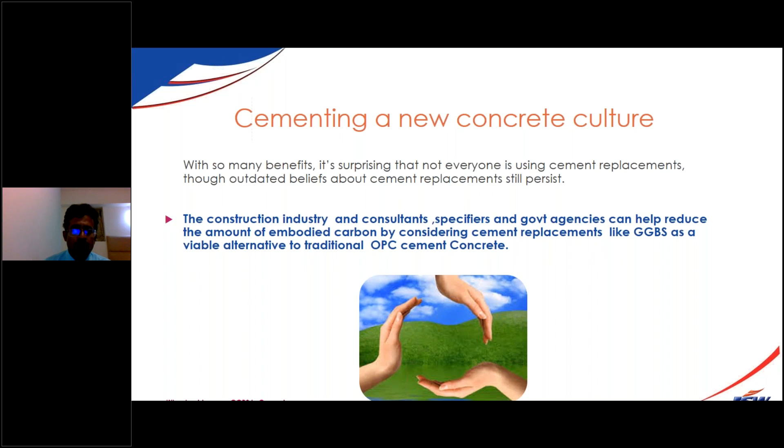I would like to tell all the viewers, about 174 people, that this product is very good. It is a quality product and it's going to make construction durable, sustainable and long lasting. I request all attendees to start using this product because it is eco-friendly, reducing carbon footprint, and making the world a better place for us, our children, our grandchildren, and future generations to come in the next century. Thank you all for providing this opportunity. I hand over the floor to the organizers now.